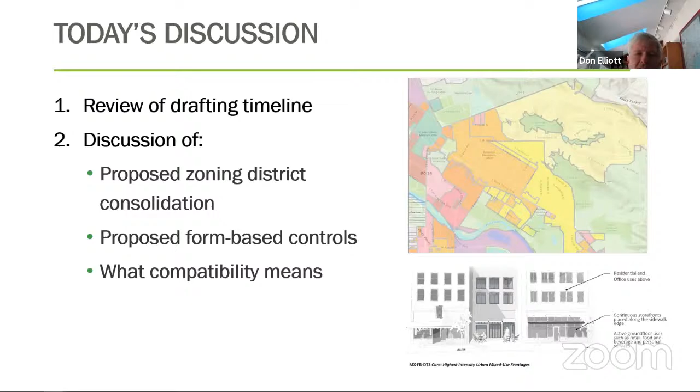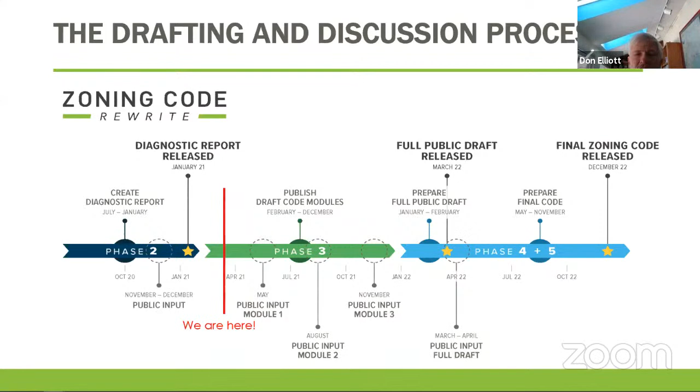So here's the timeline. And we are, again, in the beginning, we've gotten through the kind of diagnostic report. We are now in module 1. We are in the process of drafting it. And as we said, this March meeting was added to the calendar to give us exactly this. We talked about district, then we talked about uses. Now we're coming back with additional questions related to how we draft those sections. So this is briefly where we are. I got ahead of myself here. This March meeting is about remaining issues. We are putting this together. It is taking shape.

And next month in April at the meeting, we will walk you through the actual public draft. It will be drafted and available for public comment, and we will walk you through how we made some of the tricky decisions to deal with difficult challenges.

So districts and uses, module 1, which you're drafting. This is just a reminder, we're not making this stuff up, it comes from Blueprint Boise. It talks about mixed use zoning districts for regional, community, and neighborhood activity centers, varied intensity and mix of uses, a series of mixed use zoning districts to promote more transit supportive patterns of development. Consider form-based zoning, that's why it's back in the conversation today. Encourage a mix of housing types and densities in residential neighborhoods, particularly for projects greater than 2 acres.

So once again, I'm just reminding you, this is stuff that has been on the books for many years as guidance in Boise that we're trying to figure out the right way to put into a series of rules and incentives. You can see policy recommendations in the green box to the right.

Now, let's get into it. We're going to set up the first question, which has to do with zone districts. This is a menu of zone districts, the first time you've seen this.

On the left side of this column table is the existing zone districts that you use currently in Boise. On the right-hand side is our proposal at this stage in the drafting process for how we listened to what you said earlier and tried to thread the needle, reflect what Blueprint Boise said, reflect what the diagnostic said, reflect what you said in these meetings, and ask how simple and intuitive could we make this zone district structure? I'm not going to walk you through each one of these.

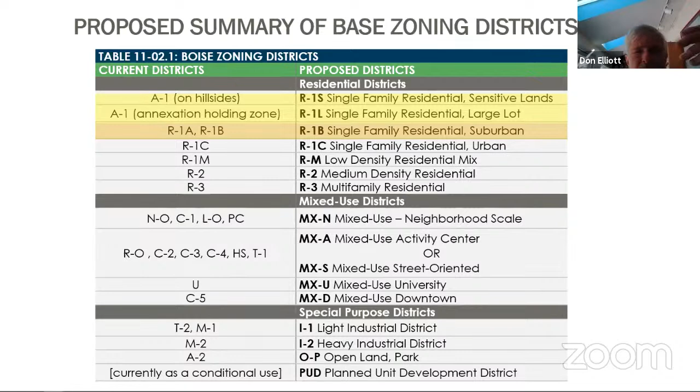The question is, does the city of Boise need large lot zoning for areas other than sensitive lands? Many cities, when we consider this, say no, we want to go forward with a 5,000 square foot lot as a standard lot. So that's a recommendation. R1M is now used. It's very little land in the city zoned as R1M, and it's kind of a one-off.

It includes some unique types of housing that are more dense than R1C, less dense than R2. This is where, at our meeting in January, you said come up with a district that allows for a wide variety of new types of housing. You said two things: part of you said include new types of housing in the existing zone districts, and other people said we also want to consider a new zone district with a very wide variety of housing. That is now recommended to be called RM, for low density residential mix.

The list of things that could be done there includes smaller lot, cottage housing, more affordable types of things - the missing middle concepts we discussed - are in that district. We have, in limited ways, talked about putting that in R1A, B, and C, but here's the point we're highlighting. You said new district. When we looked at it, we said, well, R1M right now is kind of a one-off. It allows only a few things, but they're intended to be creative.

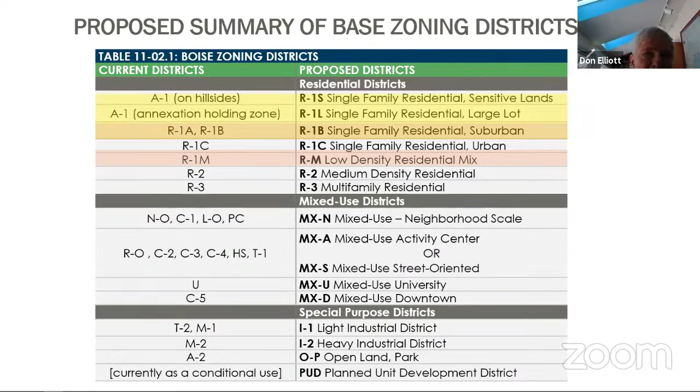Could we broaden the variety of R1M, call it RM, but make it broader, rather than having R1M as a limited variety district and then creating a brand new district with a wider variety that would look and smell a lot like RM, just a broader version of it. So this is in response to...

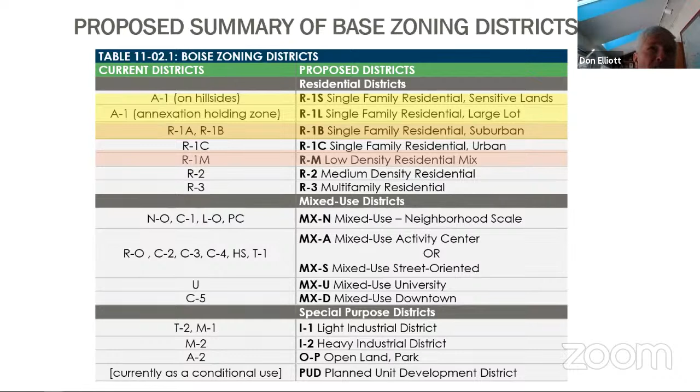Maybe there's a need for Boise to have a district that isn't trying to get new types of housing into R1A, B, and C, but instead a district that would allow broad mixes of those housing types. So that's that. I want to go on quickly in the interest of time.

This is a big area - we will not beat the drum anymore. Blueprint Boise clearly says mixed use districts at a variety of intensities. When we look at your current list, as we said in January, you've got a number of them that - yes, their uses differ, yes their minimum lot sizes differ, yes their intensities differ - but they basically are aimed at small scale, neighborhood scale activity centers.

We are recommending those four that are highlighted be consolidated into mixed use neighborhood scale. And in this case, we are recommending that six medium scale commercial districts currently - HS stands for health services, but it functions more like just a mixed use district at a medium level of intensity - be consolidated as well.

We are recommending that those be consolidated into one of two things: if they were at major corners, the places designated in Blueprint Boise as activity centers or major potential transportation hubs where you could build the transportation network, that's MXA. MXS is street oriented, meaning in between those nodes. This is what you need to do to develop a transportation system - create nodes of activity, allow mixed use in between the nodes, but at lesser intensities, not pretending it will all be a walkable center.

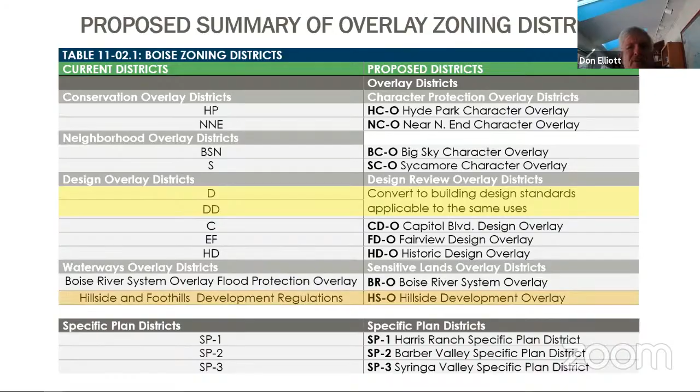But the question we wanted to lay out was: what do you think? Is this getting towards what Blueprint Boise said in terms of the types of places you would have? Now, I want to foreshadow—your design review process is still there. No one's asked us to get rid of it. We will review it and see how much can be made more objective, but you'd still have that.

You still got the dimensional and form and height and scale standards that'll come up in module 2. But in terms of a structure, holding Blueprint Boise in your left hand and those tables in your right hand, do you have any feedback for us? Don't do that, do that, I like that, I don't like that. And what did we miss?

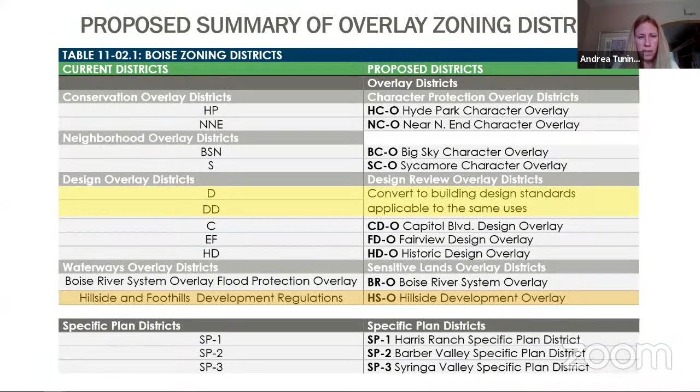I think that's a great introduction, Don. So if you take a look, we've got 23 existing zones and proposed, and Clarion has 15 zones. So if we're looking at all of those strategic priorities—can we provide a safe, healthy city for everyone, a house for everyone, mobility and movement for everyone—can those be accomplished via these zones that we have proposed before us?

Jessica has posed the question: will there be height restrictions in the proposed R zones? Yes—that'll follow in the dimensional standards section that you'll be reviewing in module 2. We just want to make sure we're looking for the right zones to get density in the correct locations that are going to support all of our strategic priorities and our mission to create a city for everyone.

I have a question, if I may. Could you talk a little bit more about the difference between RM and R2? The way you describe RM with words sounds like what I envision R2 in my mind to be. I'm sure there's some numeric differences, but in terms of the concept, if you could split that out a little bit, that'd be interesting.

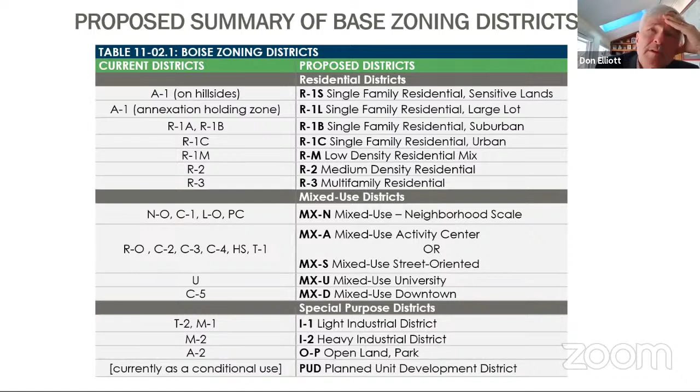Well, we're still drafting this, but in general, what a number of cities do when they rewrite their codes is to say maybe yes in R2, probably not in R3, but you write it so that all existing single family homes in those zones are deemed conforming uses. If it was erected before the effective date of the code, it is a conforming use of land, so those property owners can go to the bank and they're in compliance and can get a loan. But in the future, you're not going to be able to build single family homes in a district that is really intended for more density than that.

There are a number of things we can talk about next time. If the real concern is the people who have a particular property use today and you want to protect them, there are lots of things we can do. Is that a rule we need to carry forward so that tomorrow somebody walking into that zone would be able to do the same thing? Is it really that we want that use in that zone going forward? No. Or are we just trying to protect those already with that use today?

Just to add a little bit to that, I think once we get into module 2, we're going to start to talk about densities, what's appropriate, is there a minimum or a maximum. And once we release draft module 1 next time, you're going to have an opportunity to go through that. We're going to send you some maps and visuals that you can take a look at, see how our city is composed today, and then how that might change.

So what we talk about today will probably not be the end all be all. It will probably just pose some questions to see how things would change in the future.

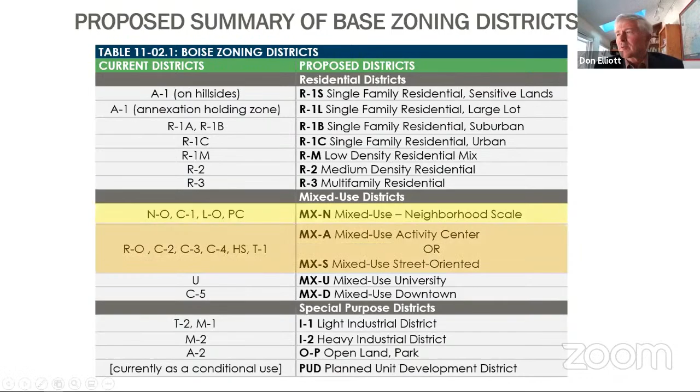Okay, with that in mind, let's go on to the next question here. I think I can still advance my slides, hopefully. Yeah, I can. Okay, so let's talk about form. There have been lots of comments. Blueprint Boise talks about mixed use a lot, and it talks about design a lot. It talks about fitting in with the character of Boise a lot. And there is no winner in this thing about whether it's more about use or more about form.

It's a false dichotomy. Every single code in America controls uses and forms, because they both matter. When people say a form-based code versus a use-based code, they're really talking about what they emphasize, or if they're really honest, they admit this is a blend. Even Denver, which has a famously form-based code, has extensive use controls, more extensive than when they wrote the form-based code. So my point is, both of these are important.

We talked a little bit about use, but I want to talk more about form, because we've only discussed it generally so far. I'm going to show you a series of pictures, and the point is to hear your thoughts on what's important to control when you say form. Is it just that you want it to be pretty? Is it compatibility, height, scale? What is it? Peel the onion and figure out what it's really about. 'I'll know it when I see it' doesn't count.

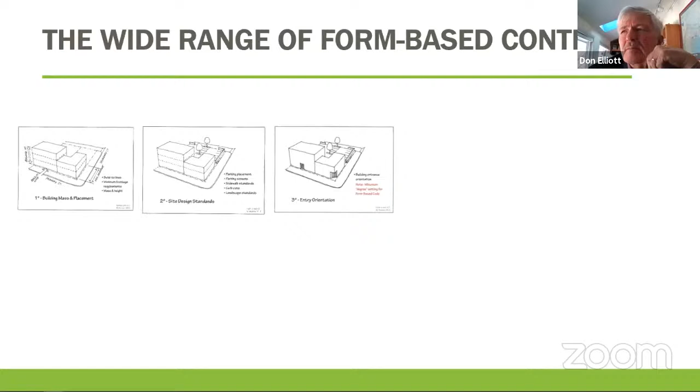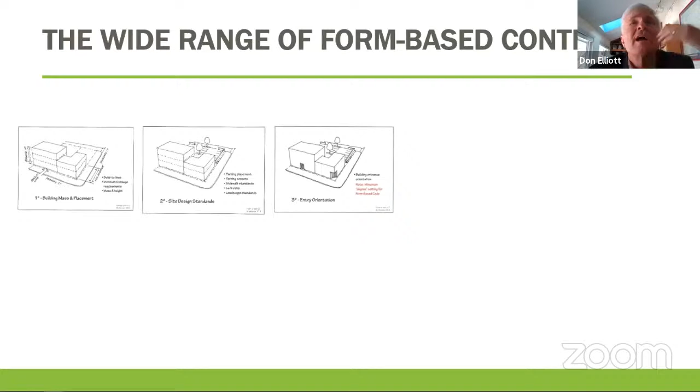Entries: you could say we want massing and parking behind the building, but we want doors on the street. We want people to walk in and out. If you want a door off the parking lot, fine, but you're also going to have a door accessible from the sidewalk or street. Why? Because it encourages walking, encourages street activity, and encloses the street, so the street doesn't become just a car canal—it becomes a place for people.

Building frontage types: does it matter whether it's a storefront? Does it matter whether it has an arcade or a covering for weather? What are the features, or how does it create pedestrian and architectural interest on the street?

Roof form: some places want to control roof forms where there's a dominant style. Is a flat roof okay if everything else in the area has one? Or do you have to match the flavor of the area? If the predominant shape in this part of the city is shed roofs, hipped roofs, or sloped roofs, is that what you want to control? Is that part of the character?

Solid and void is architectural speak for windows. Do you care how much of the ground floor is windows, so people can theoretically see in or out? Almost every newer code we've written in the last 20 years has an anti-blank-wall provision. We know some things in offices are interesting to see, and some aren't—sometimes people put up display cases and you can't actually see anyone doing anything. But we do know that extensive blank walls don't help with pedestrian walkability, so you can't do that. So do you care about ground floor windows, and how much of them? Do you care about second floor windows? Many cities that care about ground floor windows say they don't actually care about second floor windows—do what you've got to do.

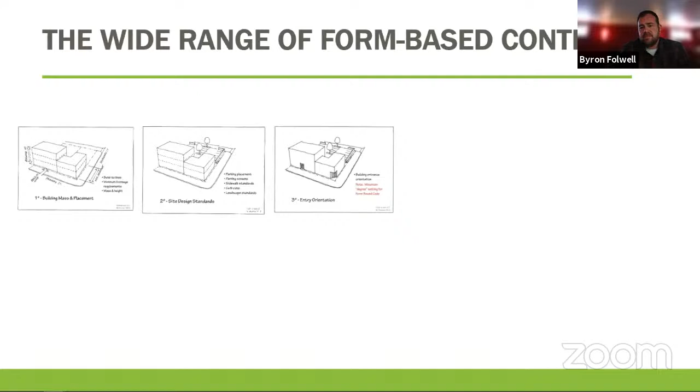Andrea, I can't see who's raised their hands. We have Ian and then Hillary. Thank you. I had a lot more to say, and then Byron talked and said it all. So I think I agree. I might go one further and say slides 1 through 4. I think how the building addresses the street is pretty important.

Some areas less than others. We're going to have, as much as people hate them, strip malls, shopping centers, things like that need to exist for a city to function.

And I agree wholeheartedly. I don't think we want to hinder creativity by saying we're not allowing this material, or you must have X amount of glazing, especially when it doesn't relate to what the building's being used for. I think, to Andrea's point, we need to think of this holistically in the city, not just specific corridors and specific neighborhoods.

But I do think there are areas that are more sensitive than others. The shopping areas are, where there's existing strip malls and shopping areas. I mean, it's part of the city, it's part of the function. So we can try and design that the best we can, but ultimately it's got to drive that. So thank you.

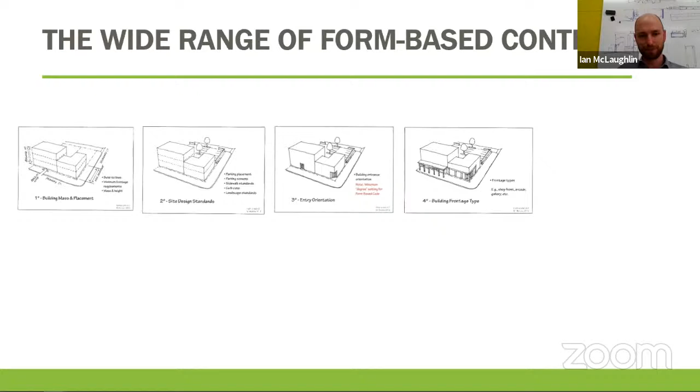Great. I'm pulling out one point that Ian said, and dovetailing off of what Byron said. One of the problems in getting far too detailed, and this was a challenge when I was on design review too, with the design review guidelines, is that you end up unintentionally precluding some uses that you didn't mean to, that would otherwise be permitted in the zone. But because the design standards are so strict, the use doesn't actually function. Or there is just a better way to do it for the use.

These are very minor examples that came up, but I do remember there was one application where the building was supposed to be pushed up to the street, but it was a car wash, and it really made sense for the cars to queue a different direction.

There was another one where the use was a pawn shop, and the pawn shop operator vehemently did not want people exiting out the back onto an alleyway. It isn't safe for anybody in that business. So again, it would have been parking up at the street.

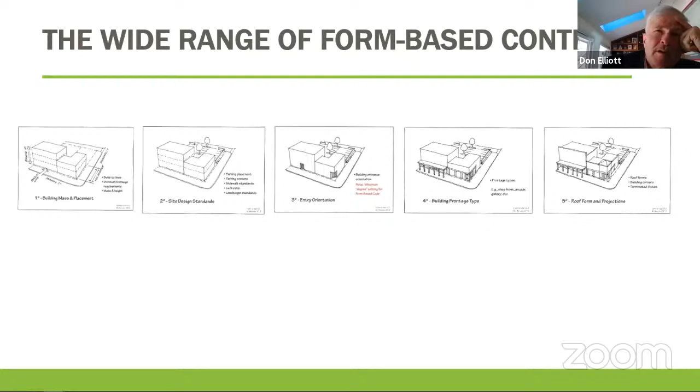I hear that maybe some people it would go up to six, but most people are down. I would clarify, in the cities that do this, they usually do limit it to downtown and activity centers. They don't do it everywhere. Sometimes they apply basic blank wall standards to some other districts. You're going to see that as we go down the road. We don't have to decide that today.

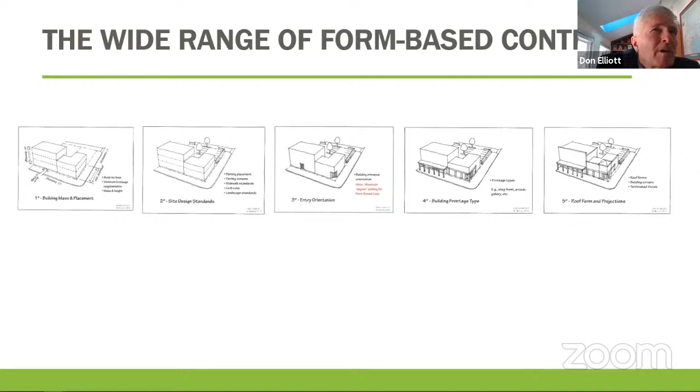One of the things I think I heard when we first kicked this off in late 2019, and then as we refined it through the meetings in the fall of 2020, I'm a little surprised at the comments I've heard so far, because what I think I heard, and please tell me I'm wrong, was that there was some frustration over the design review process, over the time it took and the outcomes being unpredictable. So I'm a little surprised. I'm listening carefully, and you are the committee. I am not the committee, but what I'm kind of hearing is we like being able to discuss with the committee what we think fits into the neighborhood, even though it takes another round of public review, or could take more than that. And I thought I heard something different earlier in the process, saying if there's some way we could add predictability and reduce the time of getting development approvals, that would be a good thing. So what am I missing here? What have I not understood?

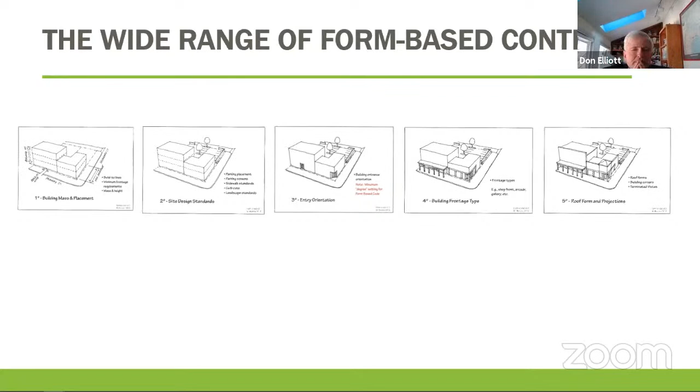Don, Roberta has asked that we put up all of the form-based control, so she can look at that. I see a couple of hands raised, but I can't tell who they are. So I have Hillary and then Byron.

Hi, Hillary again. Don, just wanted to clarify something. The design review guidelines, I don't think there's, how do I put this, it was a really good process. The way those were put together was a thoughtful process, much like this. And I think the problem with the design guidelines is that they fit imperfectly with the existing zoning structure and everything else, and so they ended up adding another layer of inconsistency. It's not so much that the process is flawed, it's just that we had this patchwork quilt of things that applied and you couldn't tell what applied from one stage to the next.

So just to flesh that out a little further, in your mind, and once again please correct me, if the design standards and guidelines used by the design review committee were clarified and updated and better aligned to Blueprint Boise and the current zone and the new zoning districts, you think that would solve what I perceive to be frustration with the process, and that alone would be enough.

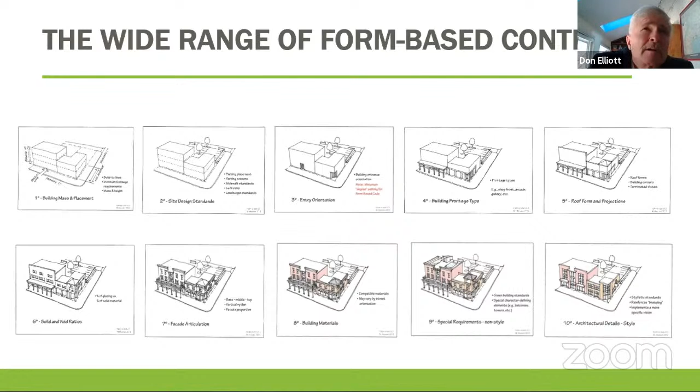And if you want a taller building than that, you go get rezoned into a district that allows buildings that tall. I'm making a general statement as an example of where it would be very helpful to us, especially as we go down the road. A lot of problems go away in terms of predictability and trust if the new code and the new design guidelines and regulations are very clear about the difference between shalls and shoulds. If everything's a should and all the shoulds can be traded against each other to try to get to a deal and a handshake, that's an unpredictable system.

And the public is justified in saying, we have no idea what they're going to do. So this question of, is it a shall? Is it a shall in that district? Is it a shall for that type of building? Is it a shall only if the building's over 5 stories? And I'm not arguing for shalls - I'm arguing for very clear thinking about what can be negotiated and what cannot be negotiated within a certain zone district.

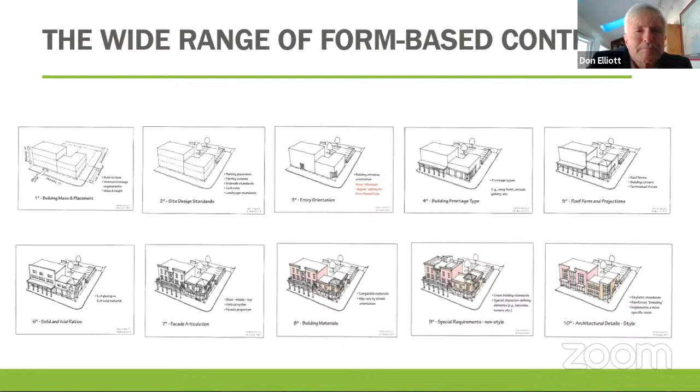Okay, we have Jessica, and then we're just a little bit over time. So we'll hear from Jessica, but I did want to point out Marissa noted that if we are trying to be more walkable and bikeable, then we have to always design toward the walkability and bikeability and those people using them.

Thanks, Andrea. This is Jessica. One thing I think we need to be mindful of is there's standards, there's guidelines, and there's recommendations. One frustration I have on the design review committee is we're just a recommendation to city council or P&Z, so whatever we approve or not approve can still get overturned by another committee above our level.

The other thing that's frustrating at times is the difference between the standard and the guideline. If you want to go back in time, take a look at the Blue Valley Mobile Home Park. That was not a fun proposal to review, because I definitely felt for the mobile home park, but I think at the time the plan met the standard. If you look at Blueprint Boise, it didn't necessarily meet that guideline, and that was really frustrating. Fortunately it got all worked out, but that was one of the big projects at least on the DR level that was conflicting for me. I'll leave it at that.

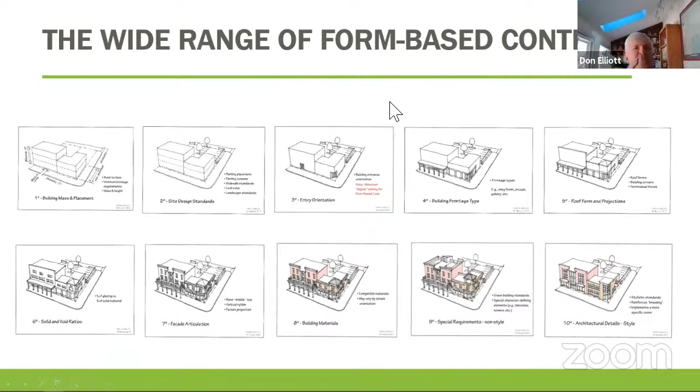Andrea, are we ready to move on? I think so. All right, let's go into... oh wait, we had a 5-minute break, don't we? We do. Does everybody want to go ahead and take their 5-minute break so they can stretch and grab a beverage, or we could just keep moving on?

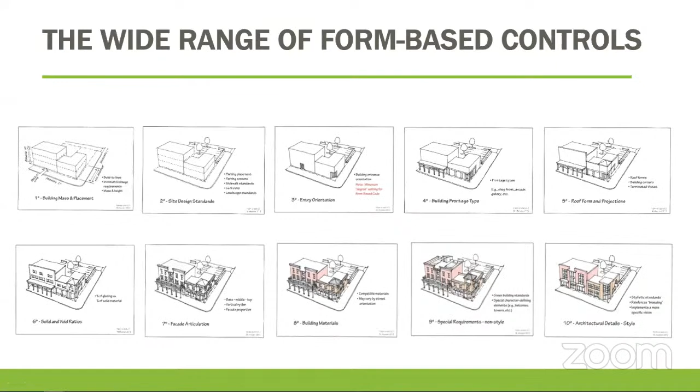Okay, so I'm hearing that, and I heard Drew say he's comfortable skipping the break. If we're comfortable, then we can certainly move along. Is anybody opposed? Okay, it looks like everybody's commenting that they're okay. All right, let's go then.

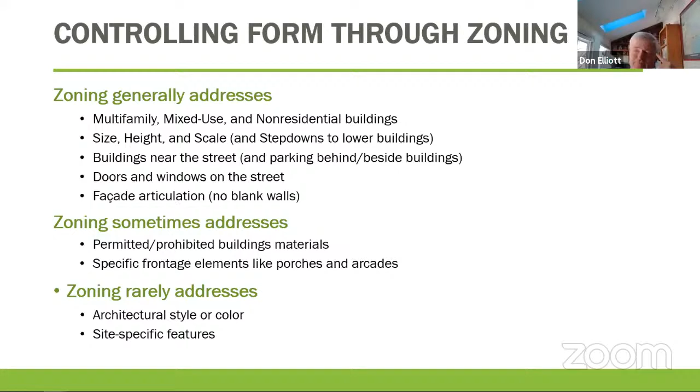We have a third topic, an important one, unlike a lot of what we've talked about in past meetings. Andrea and staff are going to help out on this, because we want to talk about some examples that have happened in Boise recently. So just as Don blathered on about form, what do you mean by form? But we advanced the ball. That last discussion gave me a much better sense of where people are in terms of what they want to regulate versus discuss in your design review process regarding building form. So this is a similar, parallel question.

What does compatibility mean? I may have told this group before, and if not, I'll tell you now: I hate this word. Compatibility means we are going to argue. We're about to get into an argument, because when you don't like something, you find it incompatible, and when you like it, you find it compatible. I'll foreshadow this by saying some newer zoning ordinances define compatibility. Compatibility means the following, and it considers the following elements of the development. So you name them, you name the six things you're going to look at for compatibility.

But again, let me back up a little. There's an issue of frustration with the current code, and I've learned a lot about where that comes from today, hearing what we had in the last 10, 15 minutes. There's frustration, and also angst over particular development decisions made by the city over the past couple of years, which travel under the umbrella of 'that's not compatible, it shouldn't have been approved, it's not compatible.' So once again, we need to advance the thinking of this group and be clear as we go down the road. When the code says compatible, what does that mean besides 'I know it when I like it'?

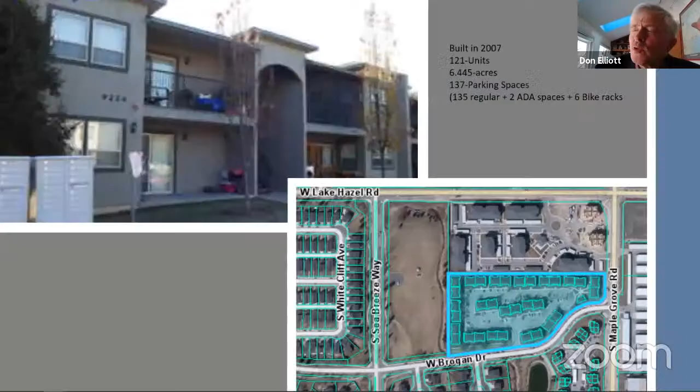So do you want to talk through these examples, Andrea? I'll advance the slides for you. Yeah, I think so.

And I think that's a great example to lead us in. Reading some of our chat comments, Roberta commented that she appreciates the concern people talk about when they talk about neighborhood character or compatibility. But when she listens to that, it can be subjective, it's squishy, it's not tangible, it's not predictable. And so in some of our past meetings, we've also talked about what that means.

Some people brought up the idea of, have you seen the development out at Maple Grove and Brogan? It's out by Lake Hazel and Maple Grove. So I went out and took a look at it, and then I called Ada County and said, tell me about it, and can you send me the approval? It was built in 2007.

It was 121 units on 6.4 acres. The development provided 137 parking spaces, specifically because they were required to provide 135 regular spaces, 2 ADA spaces, and they also provided 6 bike spaces. I talked to them and they said, oh my goodness, yes, that development created some change for us. I said, tell me about it. They said their parking code at the time said they didn't need to have much parking—1 parking space per unit, plus a minimum amount of guest parking.

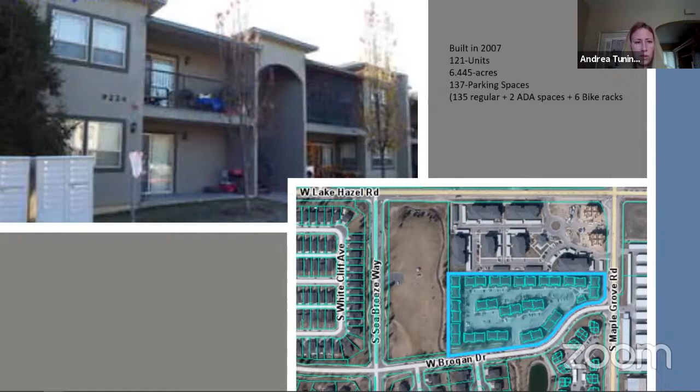Then I also heard from some of you saying, will you give me some sites throughout the city or our area that I can visit, and actually stand and smell and see and feel. So I thought it would be appropriate to walk you through a couple of those. If we can quickly go through the slides, I'll give you some items—this is actually a supporting photo of the development of what happens.

I visited the site at about 5:45 p.m. on a weekday, so this would be everybody returning home, and this is the on-street parking. The examples I provided you, I tried to give a good variance, so you'll notice some are 1, 2, and 3 stories. Some are cottage, some are just 3-plexes, 4-plexes, those types of things.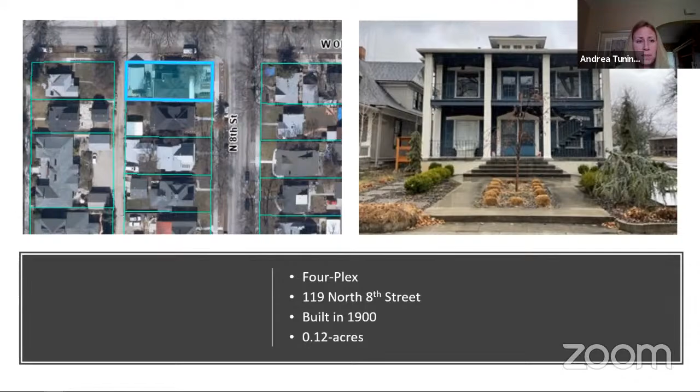Again, this is going to be about 2.5 stories just because it has the little cupola on top. But you can kind of walk, see how these are. As you are going about, look at the height, look at the massing, look where the parking is located. Do they have parking? Those types of things so that you can gauge where they're at. We can go to the next one.

This one was built in 1969. This is a 6-plex. It's near Boise State on the corner of Beacon and Vermont. It's 2 stories, and it fits into the neighborhood really well.

We also have a 10-unit multifamily development. It was built in 1947, on the corner of 16th and Bannock Street. It kind of has almost the cottage feel mixed with the courtyard feel, so that's a hybrid there. You'll see some areas it's 2 stories and some it's 3. So that exists there. We can go ahead and move to the next.

This is a 1-story flat roof structure that has actually 16 units. It is located on the corner of Denver and University by Boise State. It was built in 1946. It's one of my favorites, actually. But you'll see that's a lot of units, and actually they don't provide any parking. We can go to the next one.

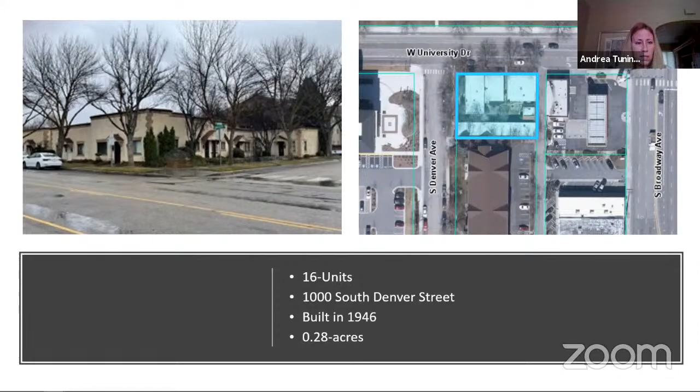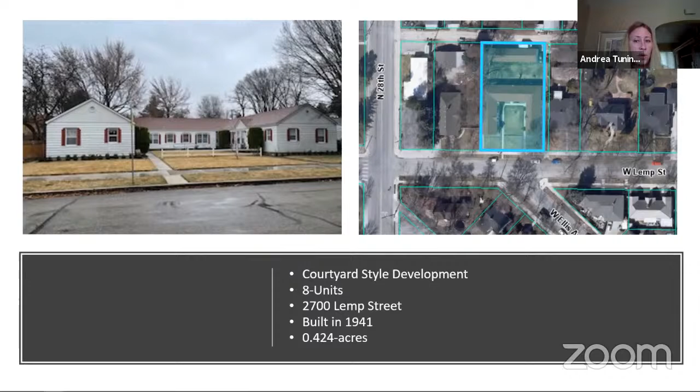This is a courtyard style development. It has a total of 8 units. It was built in 1941. So it's got that interior common space, and then it's outlined in the rear. This one was interesting - it had alley loaded garages, a single space per unit, and then the remainder was on-street parking. We can go to the next one.

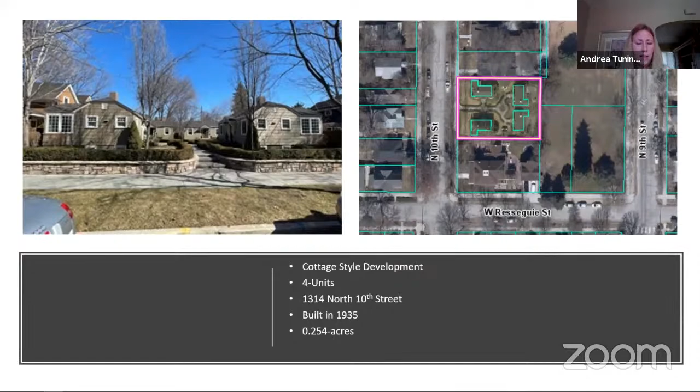Again, we've got a cottage style development. There's 4 detached units with shared common space. It's located on 10th Street. It was built in 1935. And again, no parking for this particular one - everything is on-street parking. We can go to the next one.

This is on Bannock Street. This is 7 units, cottage style development. Again, single story, very ranch style brick, built in 1951. In this particular case, again, all on-street parking, no off-street parking provided. Go ahead and go to the next one.

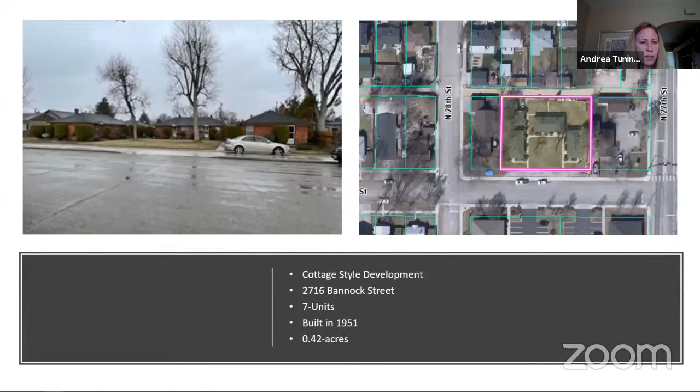Again, a cottage style development located on 16th Street, 7 units built in 1925. Your traditional gable style, cottage style homes, very cute. In this particular case, they had an alley loaded garage, but it didn't appear to be usable. The remainder is all on-street parking here. Go to the next one.

This is a live work unit. This is a relatively new one, built in 2017. The interesting thing with this development is that the ground floor living space - you'll come off of the public sidewalk as you enter, that is actually the work area for the live work where you can work. Then beyond that or above is actually the live area. All of these units are currently not being used for live work at this time. So that was interesting. Go ahead to go to the next one.

We have some other live work units. Again, these are 6 units. They're located on Iowa and Longmont Street, just off of Broadway, built in 2007. Again, the interesting part here, these units are not being utilized for live work. Work is at that ground floor up front. Live is behind and above that unit. And then the next one.

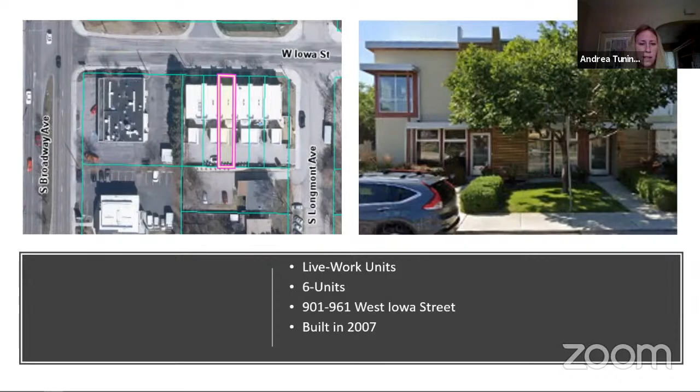And then these ones are out in the garden center. So Hill Road, 36th, Catalpa area, 36th Street Garden Center. These were built in 2009. There's actually 3 units. One is currently for lease, but the other 2 are operating as live work units. So they just have some small scale retail up front and services, and then living behind and above.

So just to kind of give you a good example of some of the things that we do have out there. This was a good exercise for me, looking at the different sizes of the units. A lot of the cottage style, those type of things, were all very, very small units - probably studios or single bedroom. And so when we're providing housing, yep, that's going to be one component that we want to think about, but we're also going to want to think about individuals that have families and have those larger units, so 2 or 3 bedrooms.

I also wanted to provide you multiple years so you could see the evolution of architecture, how that's gone about and the different ways that people have chosen to use the properties. The big one that I also noticed is taking a look at on-street parking. So that's something that we'll probably want to think about as well as we move forward. If we are building these streets that accommodate for on-street parking, if we're creating these paved surfaces, do we want to use them for parking?

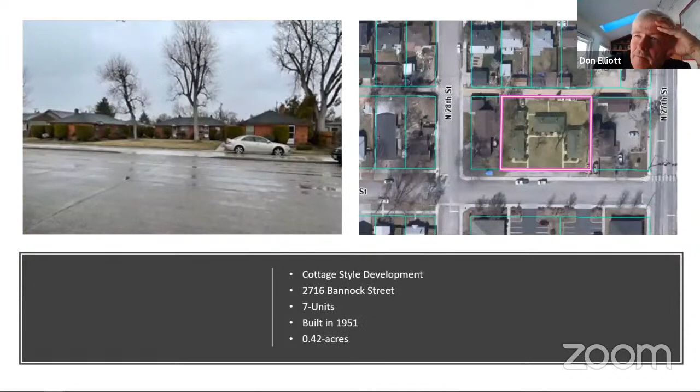I'll share a picture of that. If you're wandering around my neighborhood, you just passed it—that one's in my neighborhood. This one is universally loved, and then there's the other one on 16th Street, the cottage style houses, the ones that are 2 and 3 story. Yeah, and they're now white—that's an older one, they painted it white, put new fencing on, and so forth. The new owners of this property made it very attractive, and we were happy to see them keep it.

We were concerned that this would be leveled and something else would be built there, because I think it's either RO or C2. But the example of the property that I'll send to you is an infill project that went in about 5 or 7 years ago, and it fits in with what Brian was describing.

I hear it a lot in P&Z hearings where they give an example of a bad project, this one at Jefferson Street. But what the neighbors don't understand was that was within code. It was allowed to be 3 stories tall. The setbacks, everything was allowed in that project, but the code for our neighborhood was written after most of the homes were built. So it's next to a 2-story, very cute cottage style house, and then you have this 3-story with a very large kind of modern angled roof, which makes it even taller. That is what causes the anxiety with my neighbors, and when I talk to people in infill development in other neighborhoods around the downtown area, it's that kind of project going in.

So I'm glad you said that, Byron. I want us to have a lot of dialogue in how we can incorporate some of that into the code. I know we can't squash all new development or creativity. Taste does change, but I think that's what causes a lot of anxiety. So that's all I wanted to share.

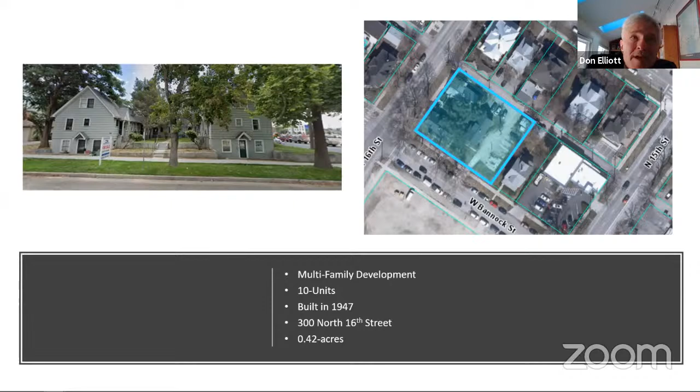There's a lot of philosophical discussion here. Are we zoning for compatibility, which I think there's a lot of discussion around in Boise right now, or are we zoning for the density we want to have there in the long run? But both options are pretty common in newer codes. There's not a right answer to that.

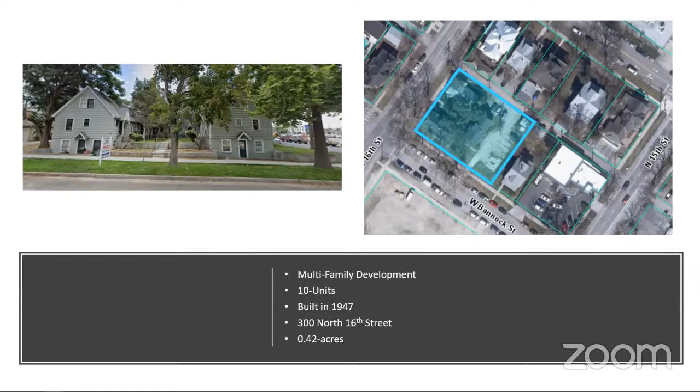It's just bad. And the way the system worked, planning and zoning and city council said design review will deal with it. Obviously that's a problem. Got to design review, and design review says that's not our issue, that's ACHD. ACHD never had a public hearing because it was under 100 units. So it's kind of a Joseph Heller kind of situation, and the outcome isn't good, and it frustrates everybody. Everybody knows it's bad. So I'll just leave you with that.

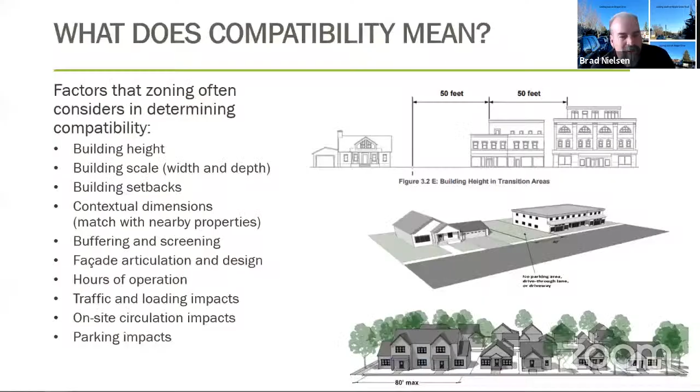Yeah, something like that. A lot of these houses, developments, or multi-family dwellings you put in are 50 to 100 years old. People are used to seeing them in their neighborhoods, and we've got to remember that. No offense, but these houses were built back when we were driving Model Ts, and wives stayed home and didn't drive. It was a one-car family.

Those kinds of things we don't even notice anymore. But if you try adding this kind of development into an existing neighborhood, remember we're in a modern world. Everybody has a car—there's 2 cars plus the kids' car. Besides that, what's the impact on sewer, water, and irrigation? Irrigation's available to some of these people. What's the impact on that, and what's going to be taken away from these existing neighborhoods?

Another thing is, we're adults here. We're not a bunch of kids whose parents never said no to them. So if you buy a house in a neighborhood and want to subdivide it, maybe you should look into what the zoning is before you purchase, instead of trying to push something through that people are not going to agree with. So anyway, thanks.

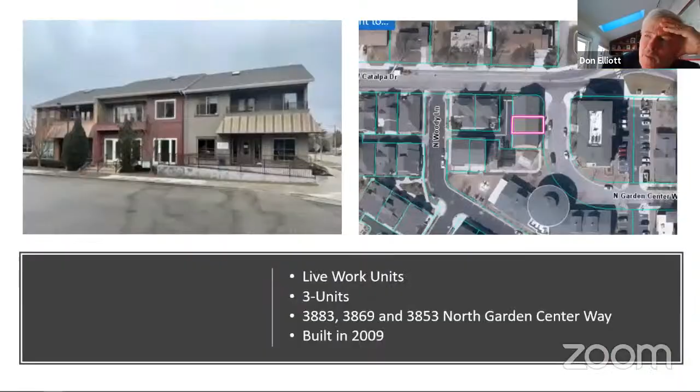So Andrea, do we need to wind up with next steps? I think that would be really helpful.

I want to remind everybody that we are changing it up a little bit for April. Instead of the 3rd Thursday, we're going to meet with you on the 4th Thursday. And next month is going to be a big, heavy lift—be ready, because we're going to release a draft of Module 1 and really get you talking.

You saw a preliminary of how the zones may lay out as we move forward. We might change those based on some of the initial feedback we've heard today. But then you're going to start to see how other things fit—you'll see the use table, where single family residential dwellings are allowed in those zones, where they're prohibited, and where conditional uses are. So be thinking about those.

You're not going to see dimensional standards quite yet—don't expect to see building heights, setbacks, or densities attached to that, because that's coming in Module 2. That's just too much for us to handle at one time. So we're going to start heading that way. Get ready for a really big lift. It's going to be big, but it's exciting.

We've got lots of opportunity ahead, so we look forward to your feedback. And I would just urge you, as we put out this public draft and you read it—and we beg you to read it—remember, this is a draft and it is there to be commented on.